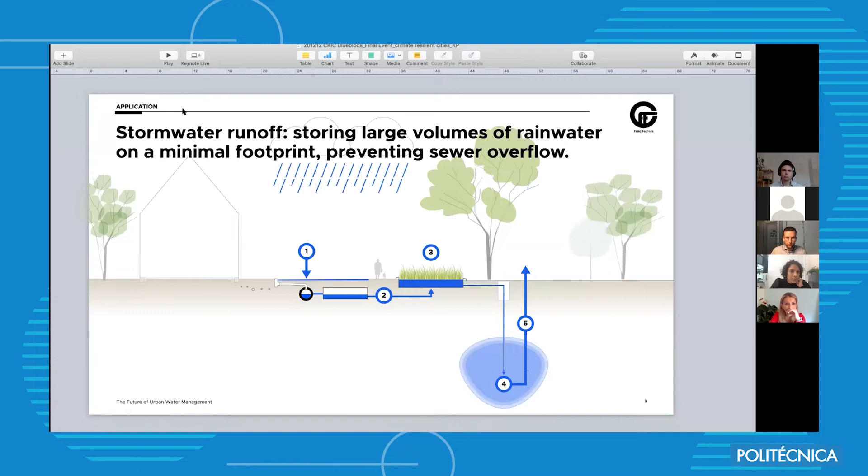Yes, let me see how I share my screen. Well, first of all, thanks everyone for joining us today. Thank you, Francesca, for the introduction. I will see how I am able to present my screen. Sorry. Yes. I guess you're... Oh, why? Are you able to see my screen now? Yes, yes. Wait, I lost my navigator. I started somewhere in there. I guess you have it now. Yes. Is that right? Yes, okay.

Well, first of all, thanks for the introduction again, Francesca, and thanks to you all for joining us today. I will explain what the Bluebloqs circular water systems are about. And first of all, let me introduce myself, maybe for those who don't know me yet. I'm Karina Peña, co-founder of Field Factors. I'm a landscape architect by training, and passionate about water.

I'd like to first start by inviting you to take a look at our cities, at the way we build cities, or let's say our current urban water model. So when we think about cities, and the way we have been building cities since the 19th century, it has of course been accompanied with kilometers of piping work to collect, distribute, and discharge water, first from the source to the users, and then most commonly to the final destination, normally the treatment plant or the sea.

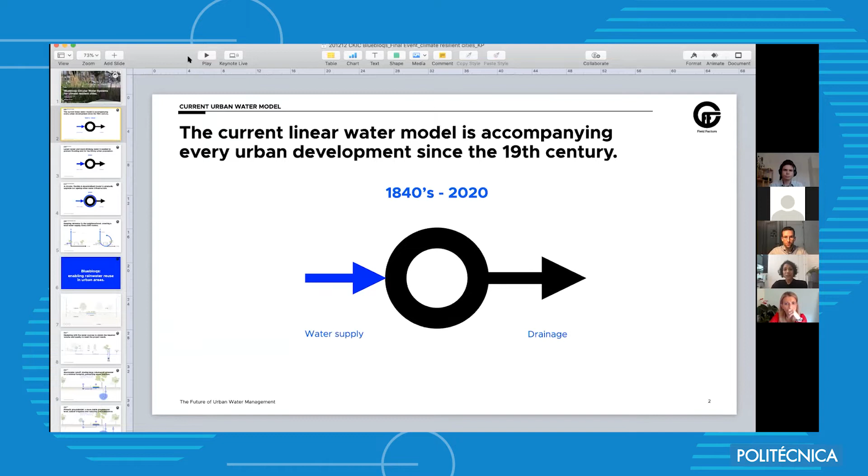But with the current challenges our cities are facing, with more people living in cities, this paved surface is increasing, and more people are demanding larger volumes of water. So it means we will require larger sewers and more drinking water to meet or supply the needs of our thirsty urban population. It also makes obvious that this current model has reached its limits, right, if we continue this way.

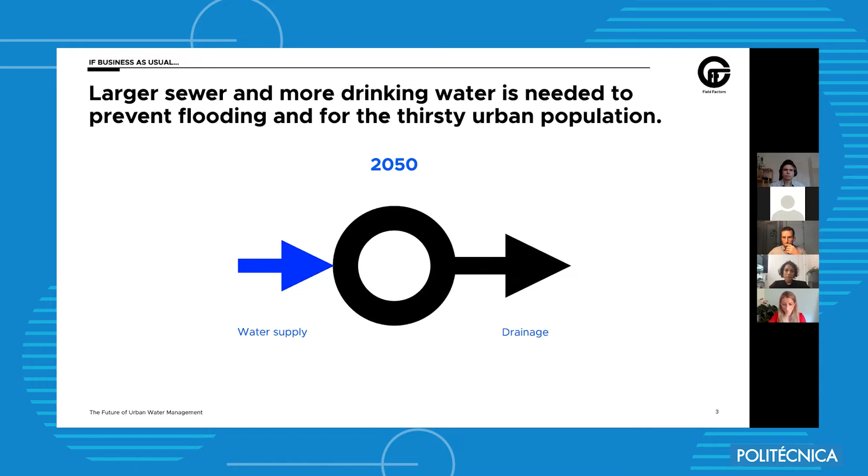So probably the solution could be a more circular, flexible, and decentralized model that helps us gradually upgrade our aging urban infrastructure, to cope not only with larger and more intense rain events, but also to guarantee the availability of fresh water for the urban population and for future generations.

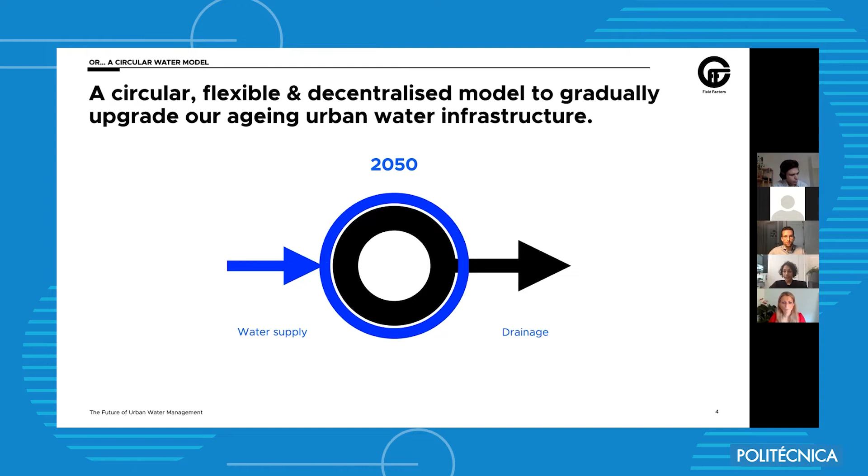How can it be implemented? We see it as feasible through small scale solutions or small scale infrastructure. Our cities are compact and busy enough, so upgrading or changing the whole system at once is not feasible, right? But through small interventions, one project at a time, every time we change or renovate a new neighborhood or street, or face a new urban development, it's a new opportunity to change the system, or to do it differently, right?

So what we propose, what we envision, are nature-based solutions as an opportunity to keep rainwater in the neighborhood, and in that way create a local water source for the local water demand, which can be implemented every 500 meters. In this way, really driving the transition towards climate resilient cities.

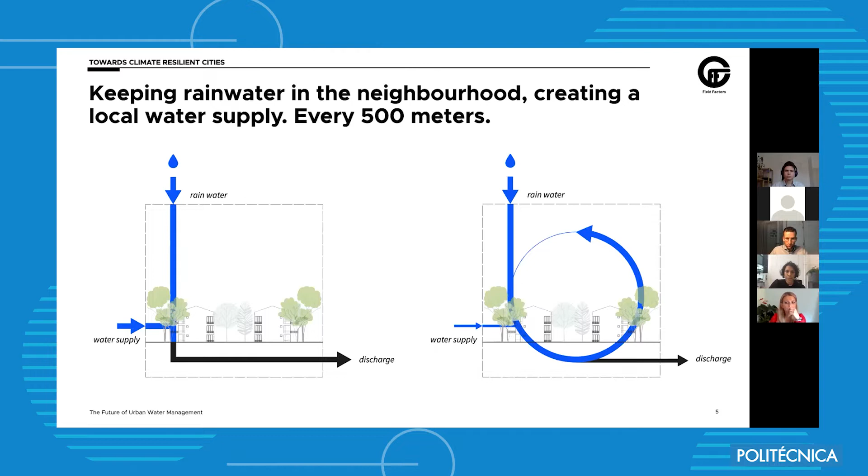And that's what we do at Field Factors. Since 2016, we have been developing the Bluebloqs technology to enable rainwater storage and reuse in urban areas.

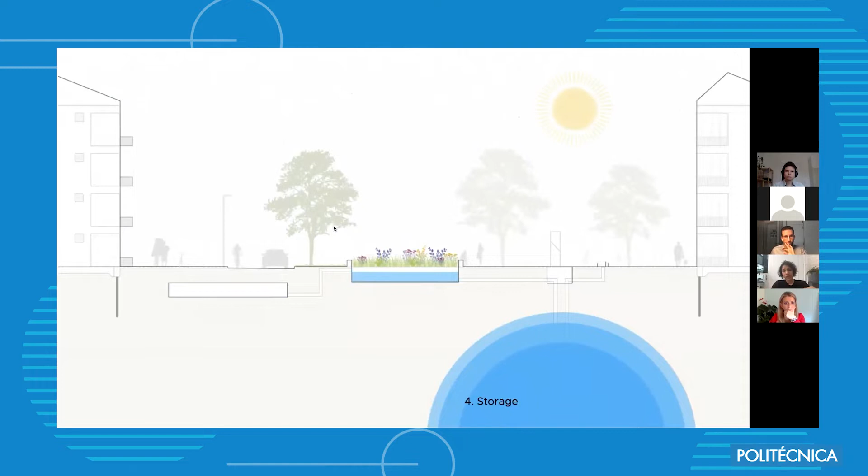And what is that? So what we see in this video is the 5 steps or the 5 functions we integrate through our technology to enable this rainwater storage and reuse. What we see is that we collect rainwater runoff from paved surfaces, which could be roofs or just pavement streets. We retain. Normally, if you collect stormwater, you need a retention solution to temporarily store that water, which can be done in different ways. Could be an underground retention system, but could also be a pond.

Of course, this rainwater runoff is not as clean as we sometimes think. It is, of course, polluted once it gets in contact with the urban activities and the urban context. We treat that water with a biofilter, which is a natural treatment system which can be integrated in the urban scene or urban landscape as a green feature.

And where we find a space to store these large volumes of water is in the underground, using the subsoil to store the water, where it can be stored for a large period of time, or let's say for the longer term, to be then recovered for different uses. So in this way, really having water available when we need it in the dry periods.

So you might be thinking, how can this be applied? So first, the first thing we need to think of is when designing with water, we really need to think in other ways, or change the approach, how we build cities and how we design cities. So instead of already thinking, I need to discharge my water, or consider a local retention solution, we encourage you just to take a look at

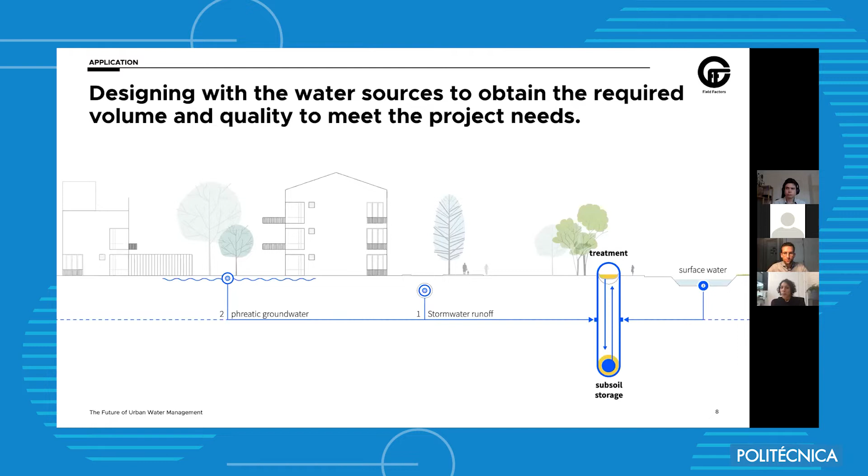your water sources, or rainwater sources we find in the urban landscape that you normally need to manage. It's rainwater runoff or phreatic groundwater, as normally happens in the Netherlands, or surface water. So how can you use or manage the surpluses of these sources and store it for when you need it in the dry periods?

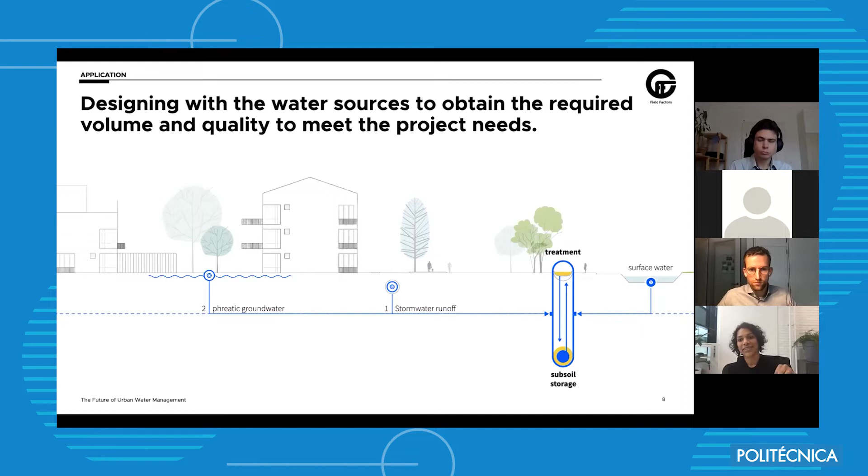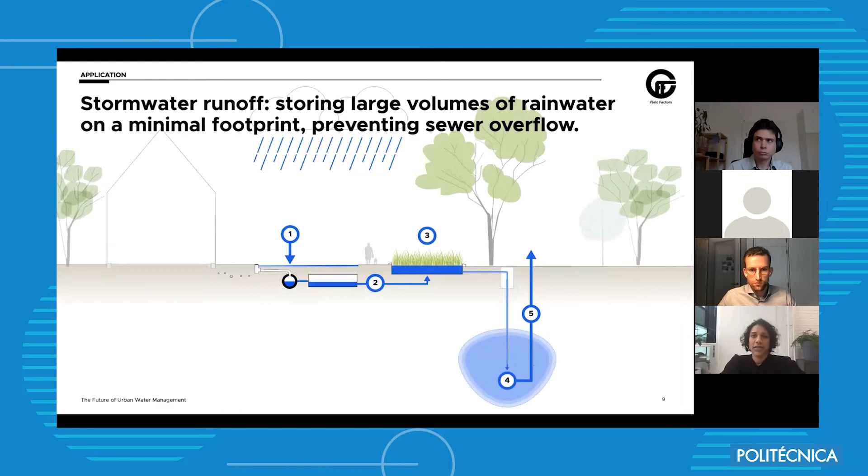So let's take a look at designing with these different water sources, or managing these different sources to apply our solution, the Bluebloqs circular water system. As it is flexible and modular, it can be implemented or designed in different ways. The technical solution will be different for the specific project. Storing rainwater runoff, of course, normally you need to store large volumes of water. That's the problem we are facing nowadays in cities. And we do that with a minimal footprint to prevent, of course, sewer overflow.

That's what's most needed. So if you have a separated sewer, you can do it in a separated sewer, and from there retain temporarily your water, then treat it, and then bring it through infiltration wells to the underground for later recovery. But you could also think of just using the streets as a way to distribute your water to the temporary retention.

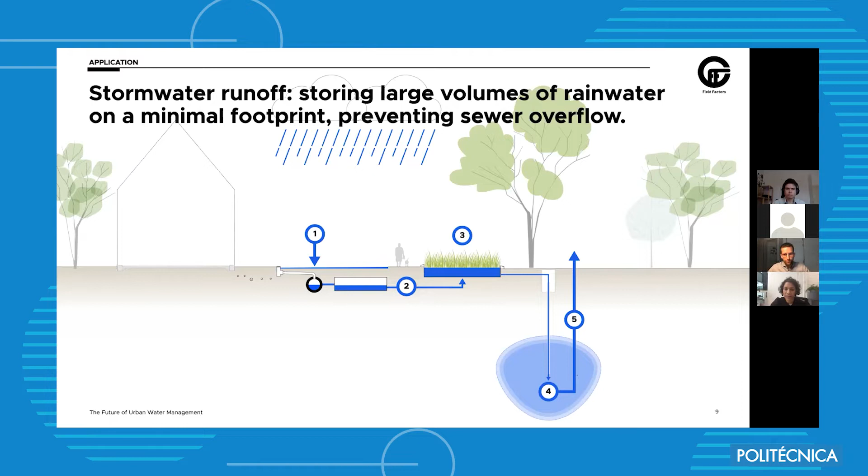In the same way, it can also be applied to create a more stable groundwater level, and in that way also reduce land subsidence. In the Netherlands and other cities in the world, especially coastal cities, this is a common problem. So you can also use the technology to drain when the groundwater level is high, bring that water to the underground and put it back when you need it, because we need to stabilize the level of water in this type of applications.

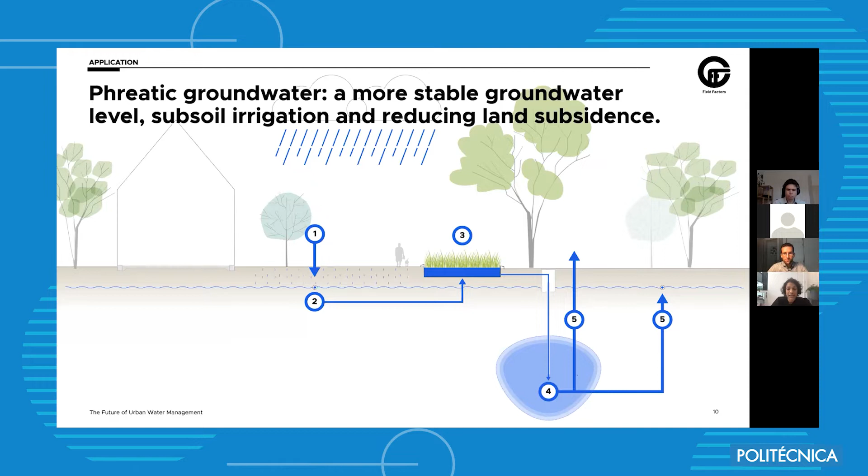Or for instance, using the system to increase the capacity of your current surface water system. For instance, if you have ponds, you could use the technology to bring that water into the underground and regulate the water levels so that the current surface elements can provide more retention capacity for next events. But also you could preserve the water quality by recirculating the water of urban surface water elements in the public space.

And in terms of use, you might think, but is it drinking water? It's not drinking water, but have you ever thought of the multiple applications of water we have for all urban functions, which don't actually require drinking water quality? For instance, what I just mentioned, stabilizing the groundwater level, but also process water for manufacturing or industrial processes, irrigation of urban green, sport fields, flushing your toilets, but also recreation and providing cooling in the hot days.

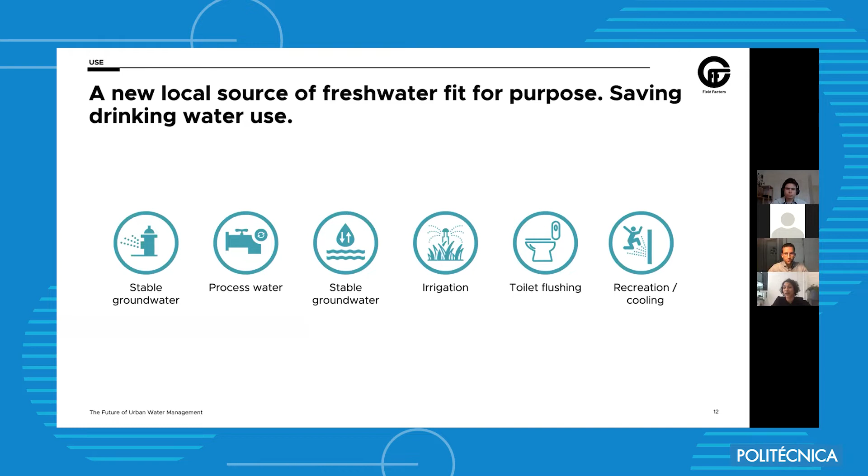So, let's take a look. Where can it be implemented? Actually, the Bluebloqs system is thought to be implemented in every urban development and retrofitting project. And we envision it as an enabler of decentralized urban water systems on a small scale, which can be implemented one project at a time. So think of the renovation of a new stadium, or a new real estate development project, or the renovation of the public space.

Of course, it has limitations, or let's say it's more convenient for projects with specific characteristics. For example, the scale is not for something as small as one house; we think more of projects from 10,000 square meters onwards. That is where you have enough catchment area to be able to store large volumes of water, but where you also have a local demand of more or less 15,000 cubic meters per year. So again, think of a stadium, or toilet flushing, or extinguishing water, and so on.

And the system footprint: as I mentioned earlier, the main barrier to implementing nature-based solutions in cities is that we normally hear we don't have the space. The city is busy. So that's why it is designed especially for highly dense areas where we don't really find the space, to have a small, still green system which is very compact and effective. So the footprint is from 30 square meters to 100, depending on the project scale, of course.

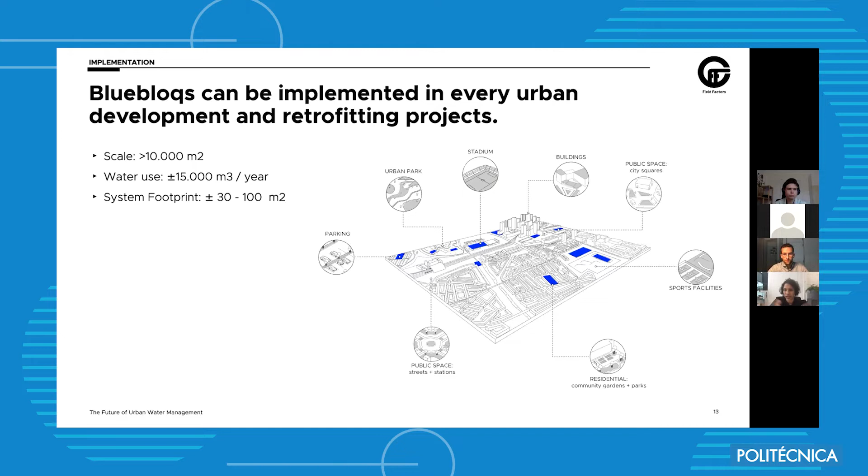And why do we do this? In the end, we are all facing the need and the challenge to make our cities greener, but also cool and climate resilient. The great benefit of changing towards more circular local water management is that we, of course, lower our drinking water use. So we use drinking water for potable human consumption, or when we need drinking water quality. In that way, we also reduce the pressure on natural water resources. We prevent sewer overflow, which is a common problem in all our existing built cities.

We lower the cost of sewer replacement as well, because instead of enlarging the piping network to create kilometers of extra discharge capacity, we can do it locally by just going vertical and using the underground or the subsoil. We also improve the spatial quality by adding green and enhancing biodiversity. And after all, it's a way to restore the natural water cycle in cities, where water cannot infiltrate anymore. So we contribute to adding water to our depleted groundwater resources.

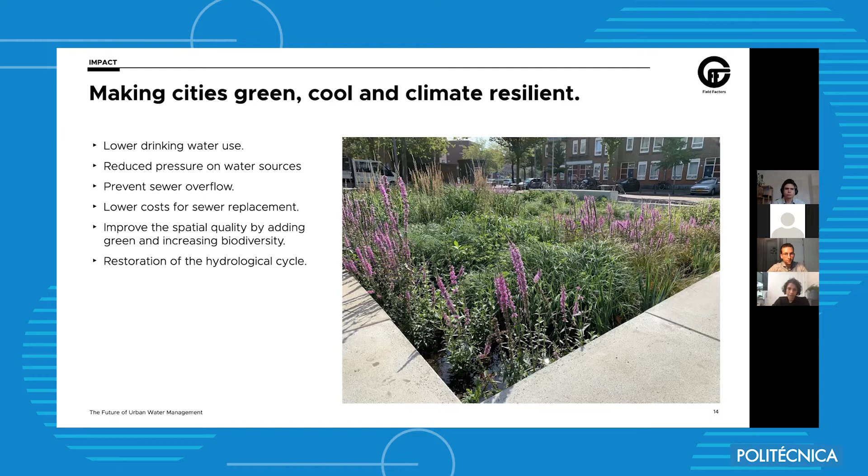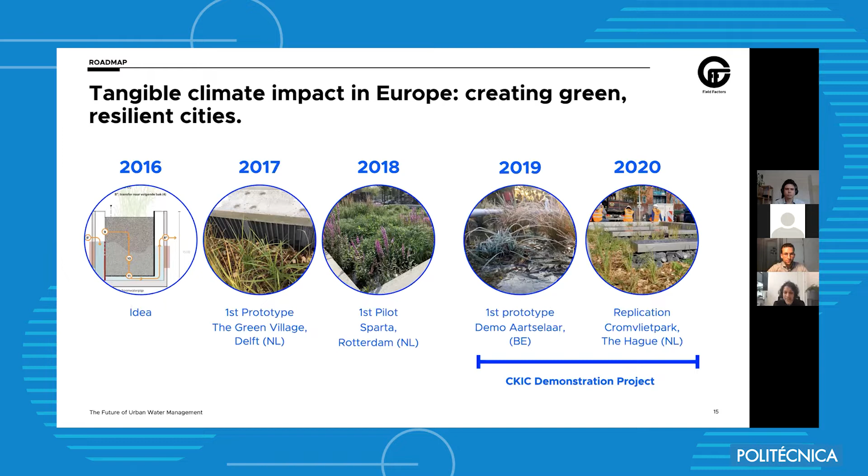Where all this started was in 2016, with just a bold and ambitious idea of a young group of people thinking that we could change the world. We came to Delft in 2016, founded our company, and we had the opportunity in 2017 to implement and test our ideas to prove feasibility. We did that at a test site here in Delft called the Green Village. That was our playground to test solutions, to fail as well, and improve.

Once we could prove that the solution works, we were able to implement a first pilot at Sparta in 2018. We were lucky enough to find a pioneer city or municipality willing to manage water in a different way. So we implemented our system in the first full-scale pilot in Rotterdam in 2018, next to the Sparta Stadium, where the water is used for irrigation of the football pitches.

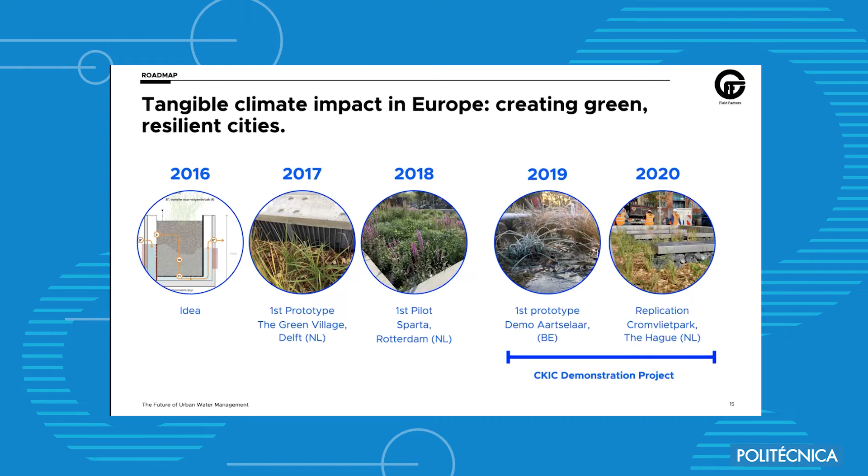And from there, two years ago, having a technology that we had proved works, what's next? We had ambitions of increasing our impact, creating tangible impact throughout Europe. The main goal of this Climate-KIC project was to demonstrate the feasibility of Bluebloqs technology not only in the Netherlands, but also to prove scalability across Europe. So to test it in other climate conditions, but also in other institutional settings with other water needs. We believe this is how we can create tangible impact for green and resilient cities. We will see the results of what we have achieved these two years in the next presentations.

Adam, who is managing next? Adam, are you there? Okay, maybe I can also answer some questions in the meantime. Boris says he has a question. Yeah. Okay. Yeah, I cannot unmute myself. So thanks for doing that.

Thanks, Carina. I have one question that has puzzled me a bit for a time. So there are various types of water that you can store in the underground. But what's the advantage of storing surface water particularly? Because I can understand the logic of rainwater and phreatic groundwater, but surface water seems a quite controlled water body. So what's the concept there? I missed that a bit.

Actually, two things, I would say. In the Netherlands, what we used to do is just pump the water away from the surface water in our whole controlled water system. So in that way, we reduce pumping water away, for when we actually also need it in the dry periods. In that way, you keep it there. But also, think of other countries where the whole water system is not controlled, as in the Netherlands.

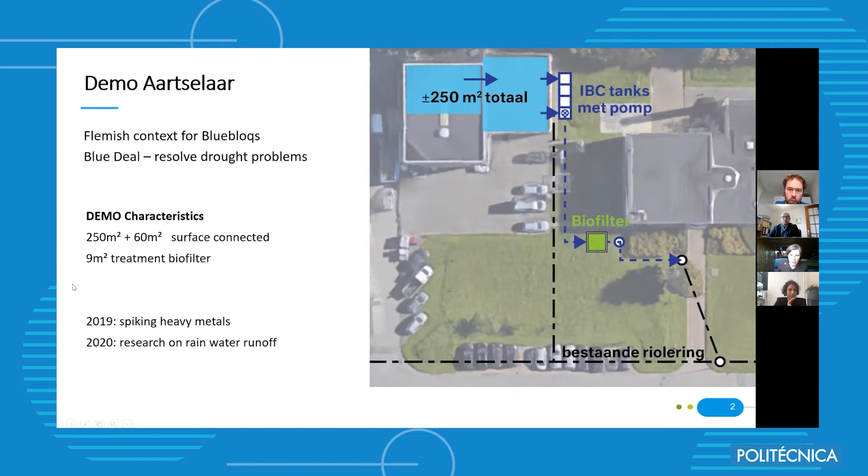As I said, we started the project together with Field Factors in 2019, and then we built the Bluebloqs demo in July. From August to December, we had a thesis student from TU Delft, Pim Versteeg, who is now working for Field Factors, doing some experiments on the Bluebloqs. Then in December, we had a stakeholder workshop as well to show different stakeholders from Flanders how it works, what the first results were, and to ask them what they expect from solutions like this.

This year we focused on more organic compounds such as BOD, COD, pH, with weekly sampling, and then monthly sampling of metals and bacteria. But I will get into more detail about that in the next slides.

So the sampling in 2019 was done by Pim Versteeg, and he spiked the influent of the Bluebloqs with heavy metals every 3 weeks from August to December. He sampled the influent and effluent, but also inside the biofilter to see the effect inside the biofilter on the retention of the metals.

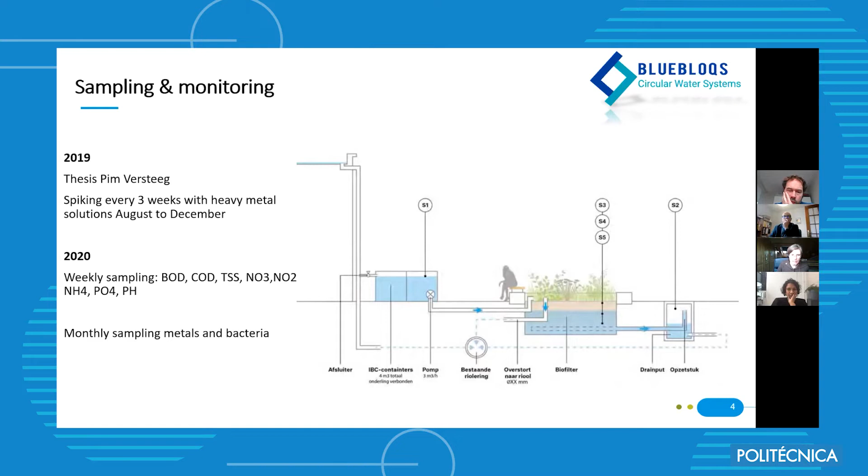This year we focused especially on the influent and effluent for different compounds such as BOD, COD, suspended solids, NO3, NO2, ammonia, and things like that. The metals and bacteria were sampled only once a month.

As you can see, the removal efficiency of the heavy metals that were spiked was really high. The first blocks you can see here - this is clearly the startup period where we even saw the running out of metals. But after a startup period, we saw really nice removal rates of copper, lead, cadmium. Only zinc and molybdenum we saw less good results, but we think this was especially because of bad mixing of the spiked solutions. So because there were very low concentrations going in, we couldn't really see a big removal efficiency.

The same goes for arsenic - the concentrations were so low that we also couldn't see a lot of removal. It's obvious if you're not putting a lot of concentration in, then you will not get a lot out of it.

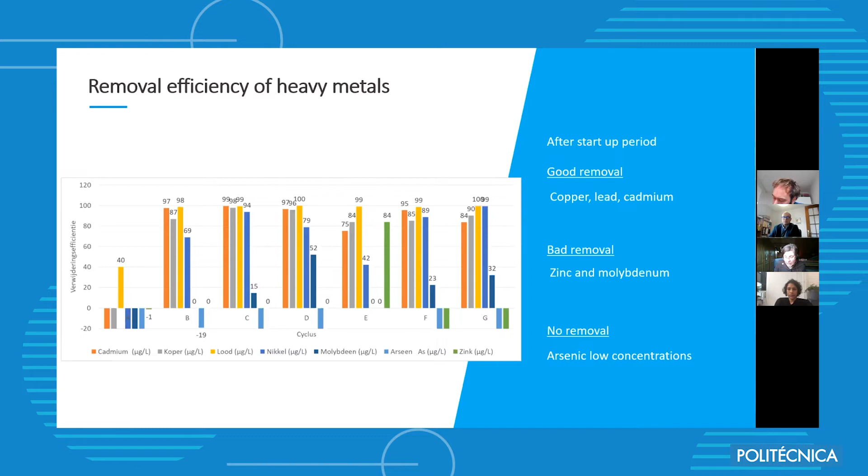For the pathogen removal, maybe it's interesting to tell you that pathogen removal is quite important for us in Flanders, because if you want to do aquifer storage recovery, so deep infiltration of water, then our legislation is really strict on pathogens. So we're not able to infiltrate the water if there are still pathogens in it.

In the first few months, we saw that there was actually no pathogen removal at all - E. coli was just all over the place. But then when the biofilm starts to form and the biofilter matures a little, we could see that E. coli was removed better. The same goes for coliforms, but other contaminations such as Clostridia and Enterococcus were not really removed - there's not a clear trend in the data. So we still have to look a little further into pathogen removal, or maybe even consider adding an extra step, like UV, to remove pathogens.

For the heavy metals, we saw that very low concentrations were going in, so the influent almost didn't have any metals except for lead. Since the concentrations were almost always below the groundwater restriction levels, it's not that interesting to look at these metal removals since they were so low.

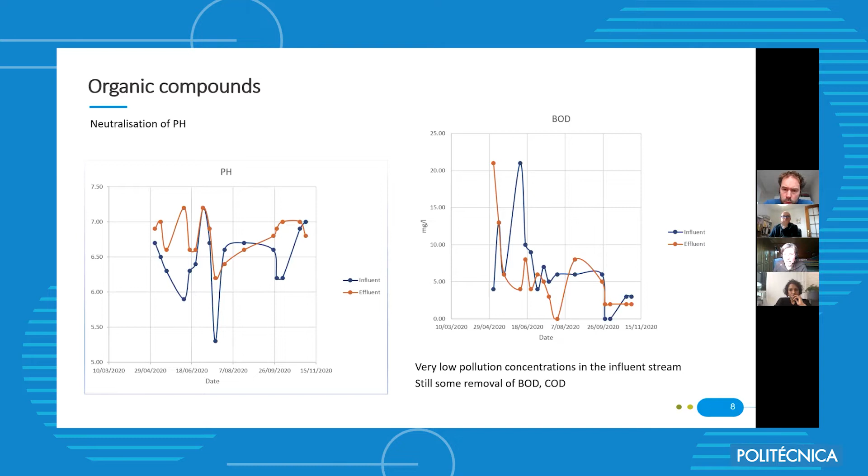For the organic compounds, we could see a clear neutralization of pH, which is very interesting since it's also important for metal retention - the pH of rainwater is quite acidic. And BOD, the organic compounds, were clearly removed by the biofilter. Again, we have quite low concentrations. So one of the big conclusions is that the rainwater runoff of the roof in Aartselaar is just actually too clean - in normal conditions, you wouldn't even have to purify this water since it's so clean.

We do see a little bit of nitrite. The effluent is definitely lower in nitrite as well as nitrates. In the beginning, during the startup period of the filter, these concentrations were not that good, so the removal rates were not that good. But as it matures, we can see that the removal of nitrate is definitely picking up.

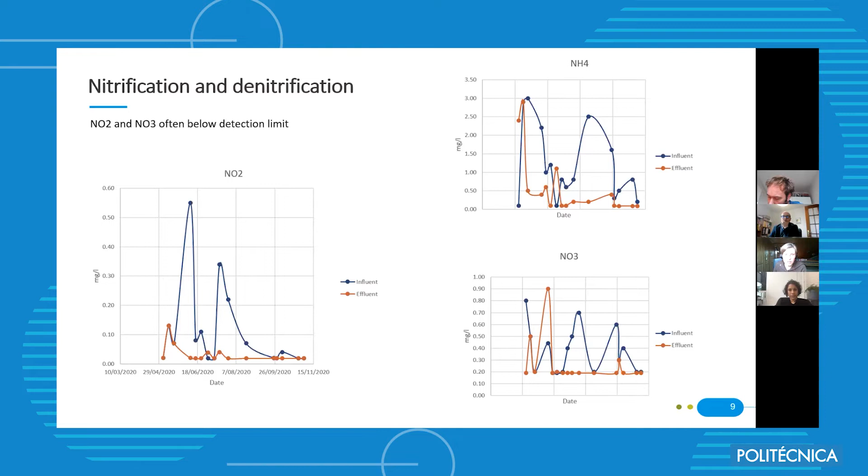Now, what are the remaining challenges for us in Belgium and Flanders? Definitely the pathogen removal is something that we have to have a better look at, since ASR is not possible regarding this water quality. We have very strict legislation regarding the pathogens.

We also lack values regarding recycled water use. For example, for rainwater, we don't have very clear legislation. So mostly now people use drinking water quality normation, and obviously that's very strict. So that's something we should look at with the governments.

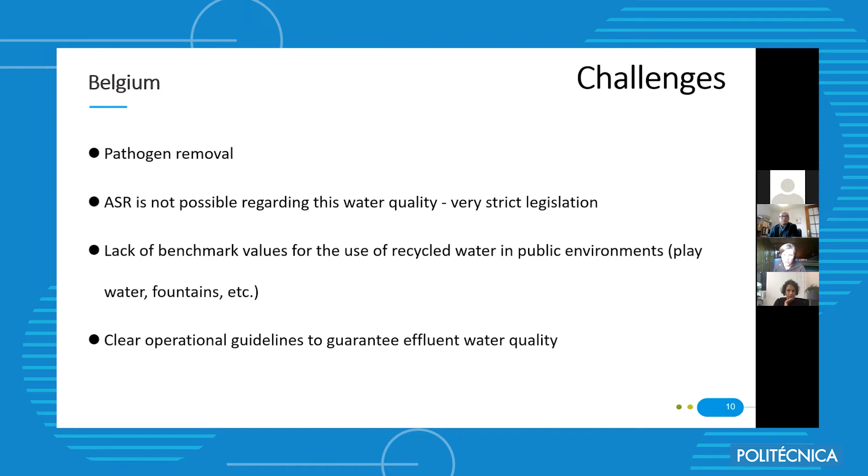Also, very clear operational guidelines are very important for us. If you want to stimulate municipalities to install Bluebloqs, then it has to be really clear how they have to operate them, how it will work, to have a guaranteed water quality.

What's next for us? Since the runoff water of the roof is so unpolluted, we will look for a new location to install the Bluebloqs, so we can keep on measuring.

Polyaromatic hydrocarbons is something that we want to have a look at, also mineral oils, because we can see that runoff water of streets contains these components sometimes. We will follow up on the studies being done by TU Delft and Field Factors, of course.

And we will keep on looking at legislation about ASR, because we think that's a very important aspect of Bluebloqs, or a very important plus point. If you can store it deep underground, you do not need that much space, and that's something that in Flanders is quite critical.

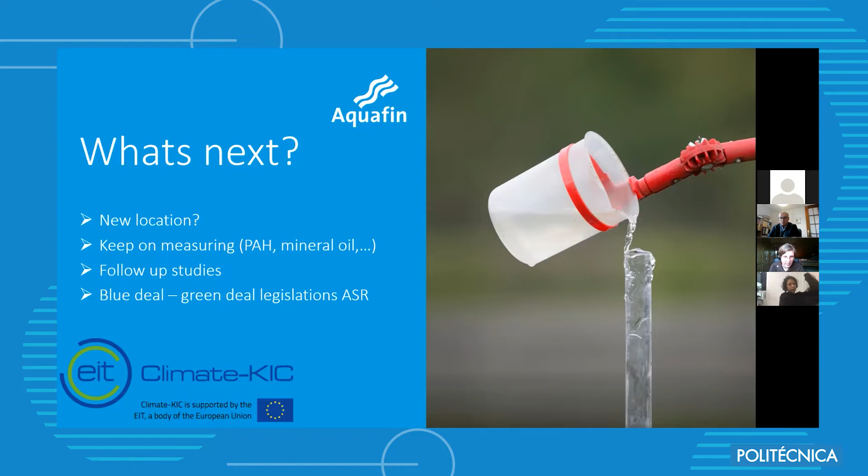Whoops. Then I can see the questions, if there are any. Thank you, Birgit. Yes, there are two questions. The first one is from Alexander. Alexander, do you want to ask your question to Birgit? I think we have to unmute him then.

Good afternoon. Hello. Thanks for your presentation, but my question was actually for Katrina, from the former presentation, but maybe you can answer it too. My question is about the time the water stays in the biofilter, to let the cleaning do its work, before infiltrating to the lower buffer. Can you tell me something about that, please?

Yeah, I think I can answer, although my colleagues will... I am listening to myself. Thank you for your question, Alexander. I will try to answer a little bit. I'm listening to myself, though. Although my colleagues will touch on this in the next presentations.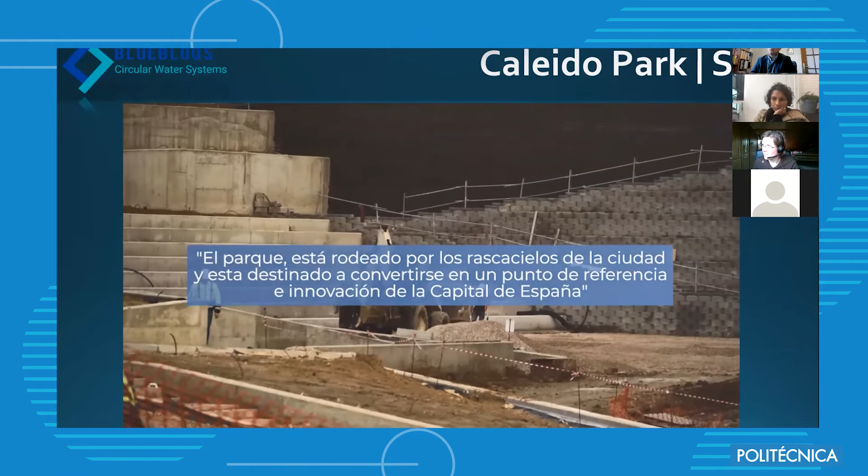Well, sorry for the subtitles, we have problems with this.

But as you see on the video, the Caleido Park urbanization is an iconic place of the city in Madrid. This green area is surrounded by the five skyscrapers of the city, and the Bluebloqs system will be located on the confines of the architectural pond at the center of the park.

The stormwater runoff will be collected through the park's rainwater collection systems and treated using the Bluebloqs biofilter, to later be used to maintain the water level of the architectural pond.

The complexity of the project is the weather conditions in Madrid, because they are different than the other two demos in the Netherlands and in Belgium, as it's a semi-arid climate with an average annual temperature of 13.7 degrees Celsius and an annual precipitation of around 450 millimeters.

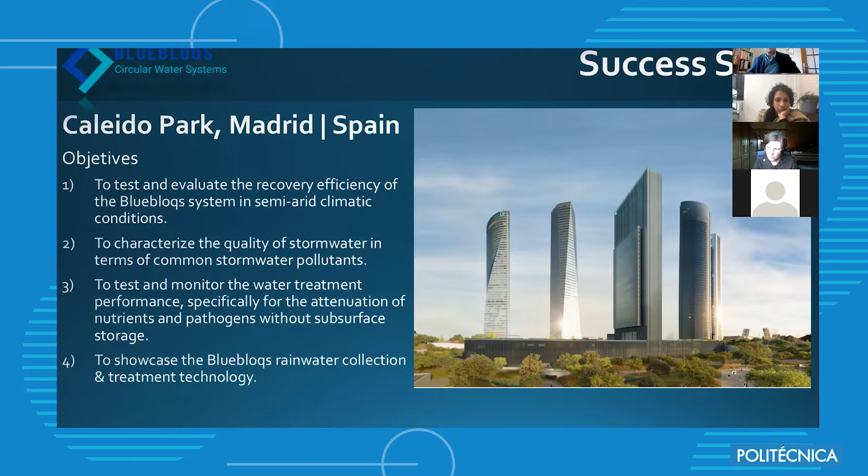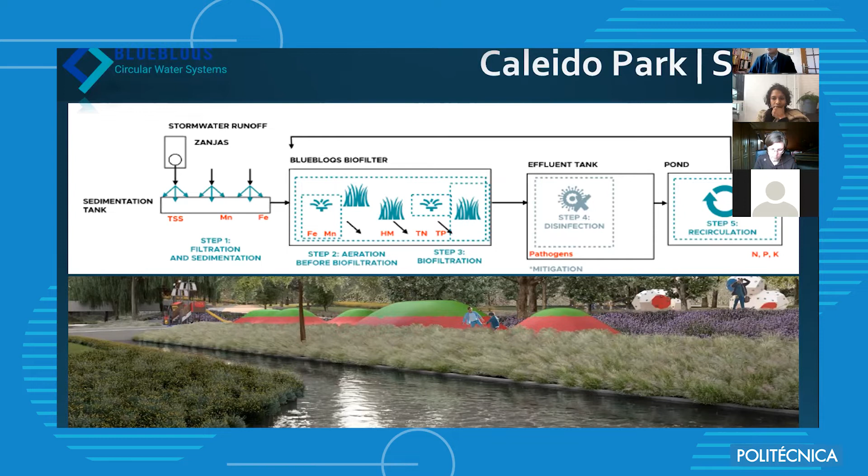This is the aspect of the biofilter, or all the steps that the Bluebloqs system will have. The first step is the infiltration, filtration and sedimentation part. Then we have an aeration and biofiltration part, followed by, if necessary, a disinfection part that takes off all the pathogens. And then we have the recirculation of the pond. These are the several parts of the demo that are going to be installed.

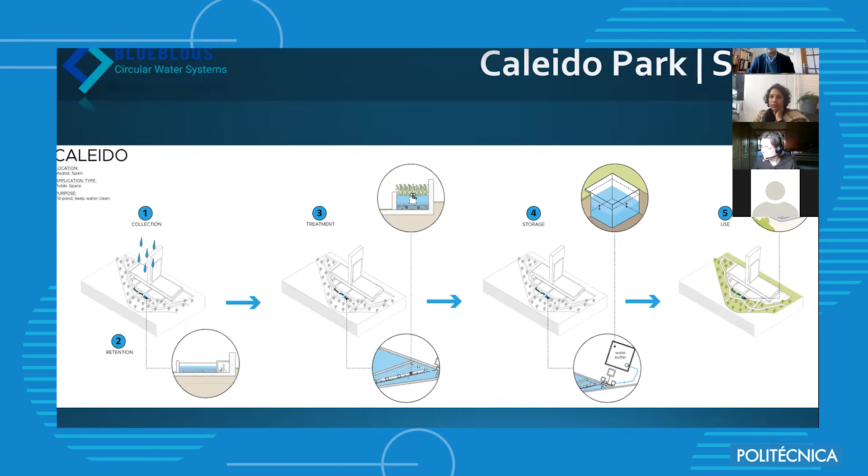The construction of the biofilter is underway, because we have had long delays due to the COVID-19 problem during this year. All the achievements of this project in Spain are principally the engagement that we have reached with the City Hall of Madrid, and also the agreement with the owners of this iconic place to implement the system inside the park.

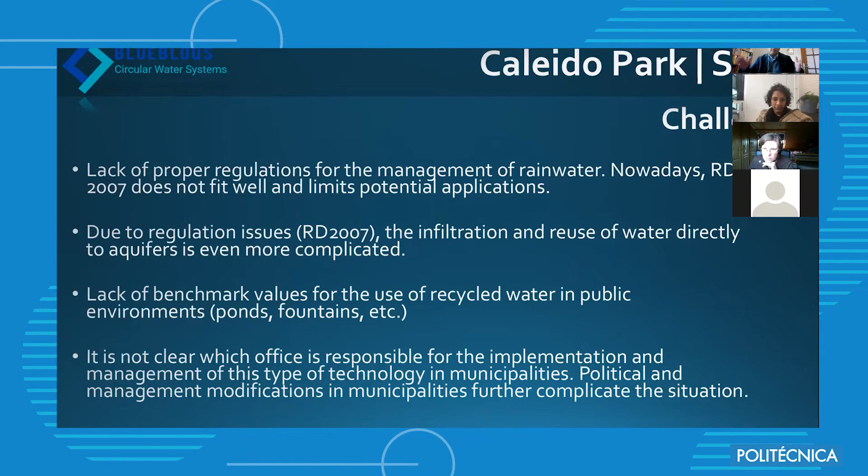What are the challenges that we have identified? There's a lack of proper regulation for the management of rainwater, and also due to regulation, the infiltration and reuse of water directly is complicated and is not allowed right now. We also identified the lack of benchmark values for use of recycled water in public environments. And after the implementation of the biofilter, it's not clear which office is responsible for the management of this kind of technology, and there needs to be clarification during the monitoring period of the system.

Now, do you have any questions about this demo?

Well, I let the turn to Joshua Gallegos, who is going to tell us about the demos in the Netherlands. Before that, sorry, may I just make one short comment related to Boris' question before, the project in Caleido is...

A very nice example of how the system can be used to manage surface water. In terms, we will be recirculating there an architectural pond in the park to keep it at good quality. Yes, that's something to emphasize.

Thank you, Karina. Well, this is the video of the Hitteplein in the Netherlands.

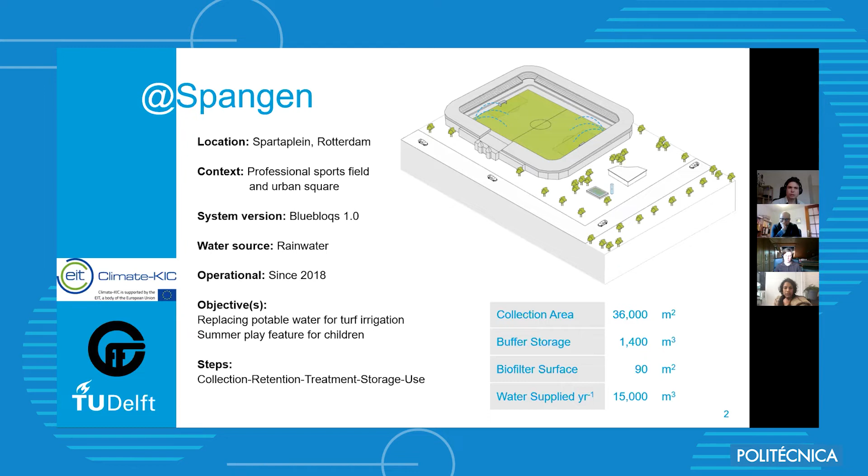With the Spangen site, under the Climate-KIC project this year, TU Delft conducted research specifically on water quality at this location, on the fate of metals, and also fecal indicator bacteria and pathogens within the system. These are two parameter groups really relevant to reuse applications, and stormwater contaminants that come up a lot because they frequently occur in elevated levels in stormwater.

We had two master's theses, one on each of these topics, and we learned a lot about how the operation of the system affects performance when it comes to removal of a wide variety of metals, and also about four different microbes we were looking at specifically, going into the system, coming out of the system, and after the subsurface storage step.

This is quite relevant to legislative oversight and the permitting process. The metals are on a permit granted by the local water board, Delfland, and required to be monitored regularly. The microbes in the Netherlands are actually not a parameter looked at on this permit, mostly because aquifer storage is known as a treatment barrier for pathogens and is generally considered quite effective for that.

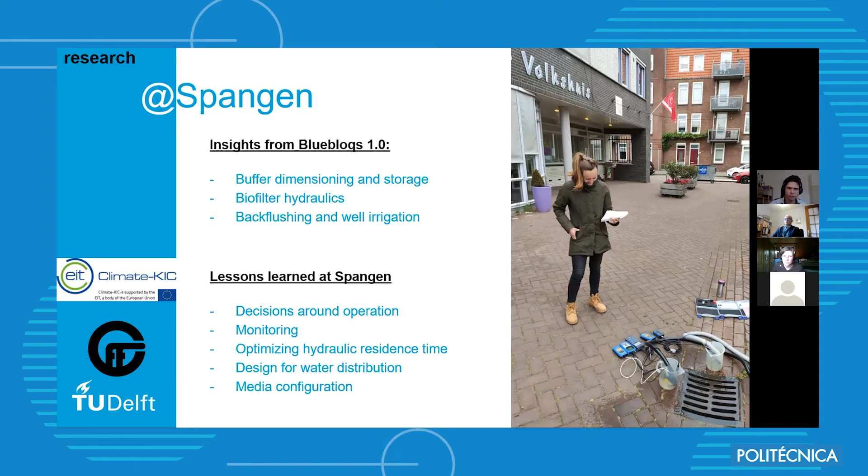The second installation that I'm going to talk about is the Hitteplein here. So this is the video that you just saw, and I'm sure I'm not the only one who didn't completely understand the narrative there, but the short of it is that the Hitteplein is a technology demonstration space. This is the second system that's been installed there. So municipalities and various other visitors will come to look at the Hitteplein to take a look at upcoming technologies or technologies in development, specifically for climate resilience.

The system that we have installed there is a test pilot, and it will be used to test biofilter improvements in support of the full-scale system in Spangen. Some of these improvements will be mentioned on my next slide, but just briefly, the scale is much smaller, of course, here. So we're collecting from about 1,600 meters of paved surface of the Green Village. We have 4 test plots that are all outfitted a little bit differently for testing reasons.

And I think in addition to the test function and demonstration function, the water here will also be used to supply a bathroom for toilet flushing at the Green Village as well. And this Hitteplein means the heat square, and this is really focusing on demonstrating cooling adaptive technologies or technologies that can contribute to urban cooling. Here on the final piece, we do not have an infiltration step. We're really demonstrating how the water can be applied to irrigating green space and the other application in the bathroom.

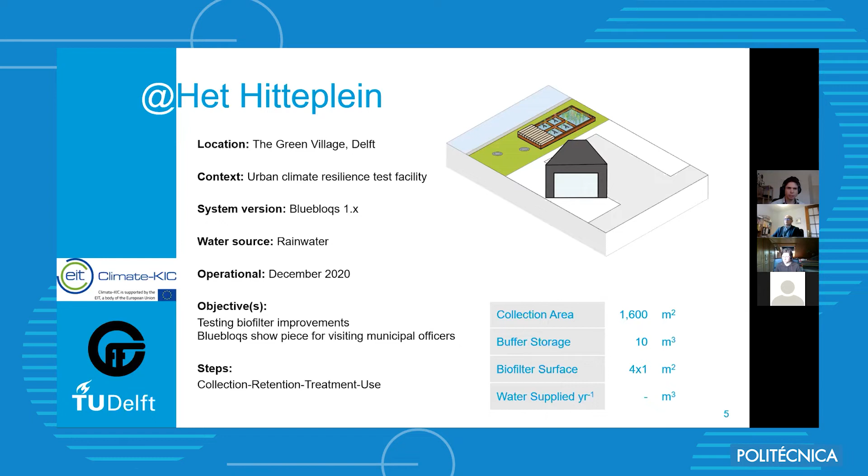So some of the goals of this pilot are to assess the effects of different media configurations, which we are playing with based on our experience at Spangen. We have designed a new water distribution system, which is sort of a prettier version of the one that went in at Aquafin. You can see it on the right here, but that has a number of different justifications in terms of water quality as well, having to do mostly with water distribution and aeration.

We're going to be testing different feed regimes, so how fast you put water into the filters and how long the water moves through the filters there. And we have also made a few additions to the technical components here. Again, this is what we call a living laboratory. It's very near the Field Factors office and on the campus of the Technical University of Delft. So we have ready access to perform research, sampling, very close monitoring and evaluation of what's happening in this system as we make different adjustments that we want to see the results of.

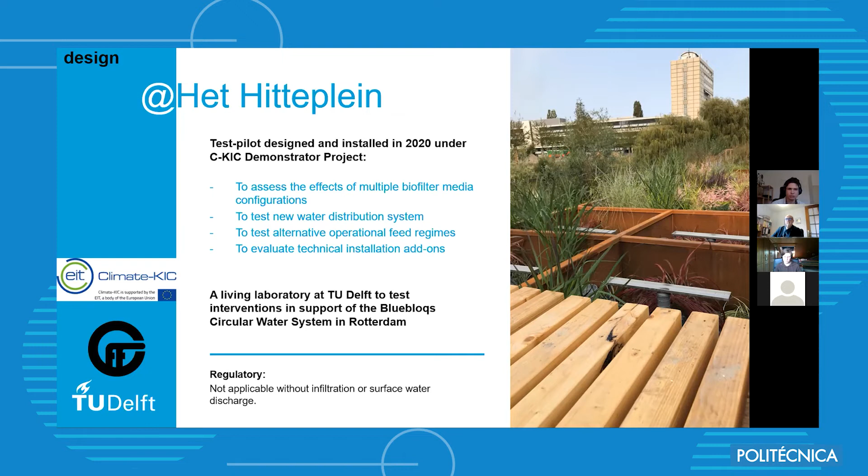The goals of the research here are really focused around manipulating pH and redox conditions, which are highly relevant to treatment of a wide variety of pollutants beyond just metals and pathogens, but looking at dry and wet cycles, soil moisture control, and again, as I mentioned before, balancing feed versus retention, which is sort of a quality versus quantity issue. It's a pretty clear thing if you think about it a little bit. The longer you keep the water in, the less water you are able to store. Design upgrades I've mentioned a little bit before.

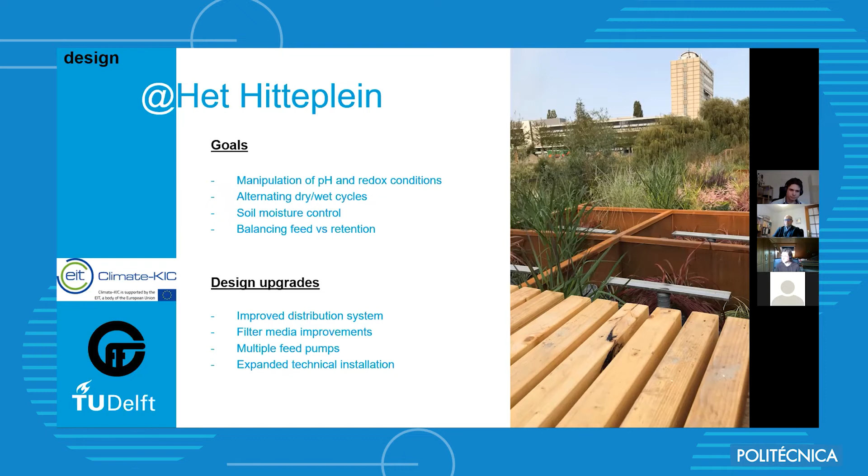So I will move on to the last site here, which is at Cromvliet. I think we have one more video coming up after my presentation here. The Cromvliet site is located in the city of The Hague, and this is also about a block scale where an urban park has a collection surface of about 8,500 meters. The demand is around 2,000, and the water there will be used to supply urban gardens. So there's a community garden there where vegetables are grown, but also quite a large green area of grass, where an urban farm with livestock animals is kept.

So this will be, again, all 5 steps of the Bluebloqs concept applied, including the subsurface storage. And the novel feature here, besides implementing some of the new components and design changes that we have made since Bluebloqs 1.0 in this first full-scale Bluebloqs 2.0 system, is that this is also the first system which will utilize both surface and rainwater to provide long-term storage for the urban green space maintenance.

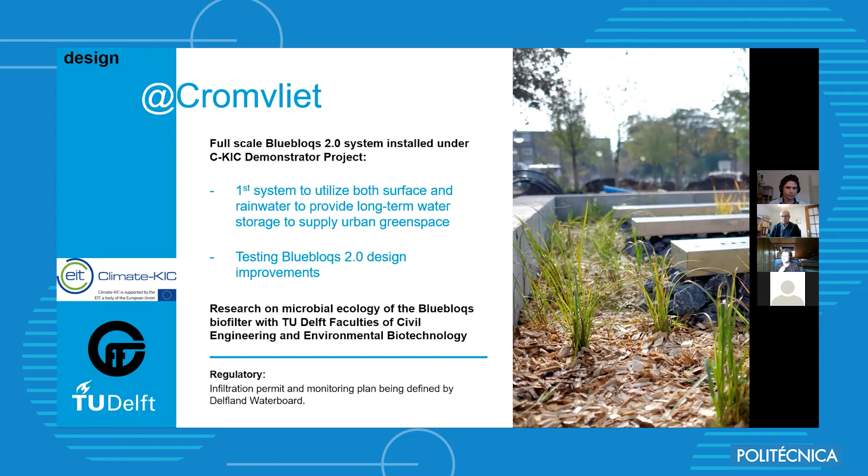Again, the design upgrades I went into a little bit already, but we have a different filter media here. We have a much elaborated water distribution system that's giving us better spreading and aeration of the water passing from the buffer tank into the biofilter itself. There's also a new well configuration for the infiltration, which allows for longer subsurface storage, which in theory would give you better pathogen removal there as well.

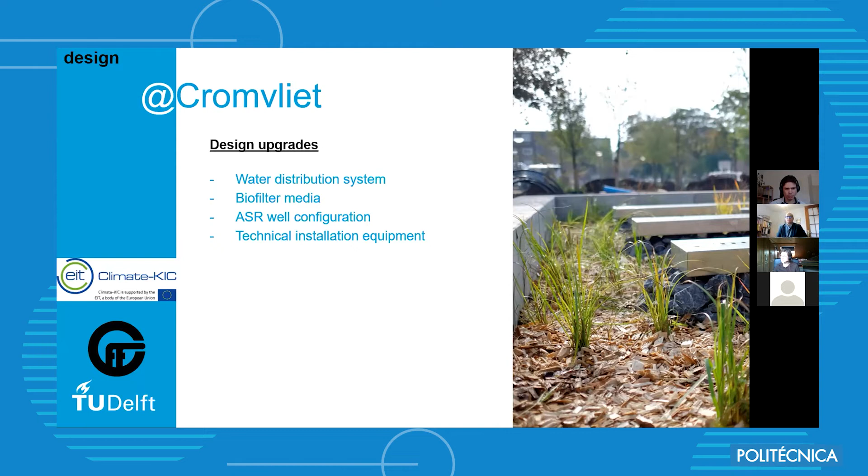And there is a more sophisticated technical installation here with more sensors, because again, this system, along with the other demos, aside from Spangen, was built more with a research purpose in mind, trying to identify when during operation we see the best results in water treatment performance.

So one final piece that's a little bit less technical, but something that's also very interesting to me as a PDEng. This professional doctorate is sort of half academic and very much applied, and the reality is that the function of the systems comes down very much to implementation and operation and human factors. So we have also been developing commissioning protocols to really baseline system performance at the outset, to understand how settings are made in terms of justifications and assumptions that can be compared to how the system performs later over time, and really can provide insight into how we adapt it to improve the performance based on the initial settings. And this is, of course, still a learning process.

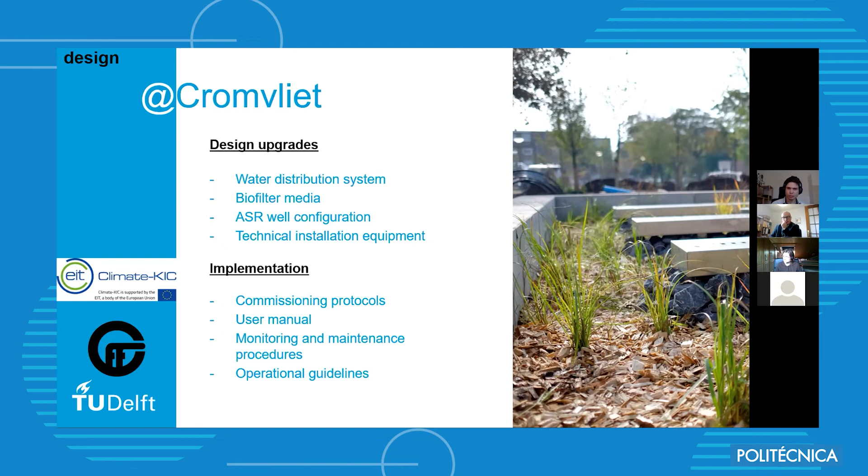We've also been developing a user manual to better communicate these sort of details to stakeholders, municipalities, and other project partners, and monitoring and maintenance procedures, which will elaborate the basic operations that need to be done to maintain the system and what to look at. And finally, the operational guidelines is where this ties back to performance: how do we operate the system and why, and that should all be outlined. And of course, this information is something that we're generating, and we need to communicate eventually in official ways, as was referred to also by Brigitte in the earlier presentation.

So yeah, going into my reflection on the work we've done in the past 2 years of the Climate-KIC Bluebloqs Circular Water System Demonstrator Project. The first thing is pretty obvious to anybody who's worked with public project implementation, but the implementation of our demos was slow. It took a lot of time. It was very ambitious to have 4 running systems within 2 years, novel systems that are not super big, but not tiny in scale. So COVID 2020 aside, even the public tendering process and various construction delays gave us a very slow period till we saw these systems implemented.

However, that also gave us a lot of time to really zoom in and learn lessons from the system that we have had operating in Spangen, to look at the data from there, to generate a lot of new data from there, and to understand how the way that things have been run in Spangen can be improved, and what has worked and what hasn't worked, and really to be able to translate those lessons into the design of the new system.

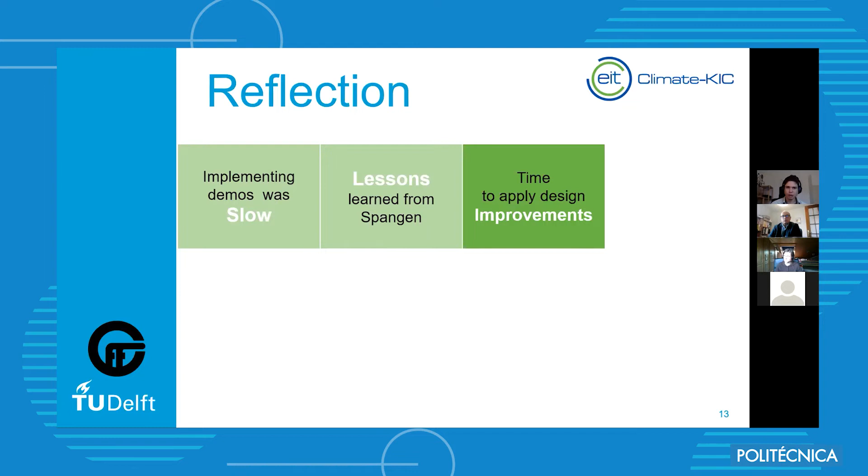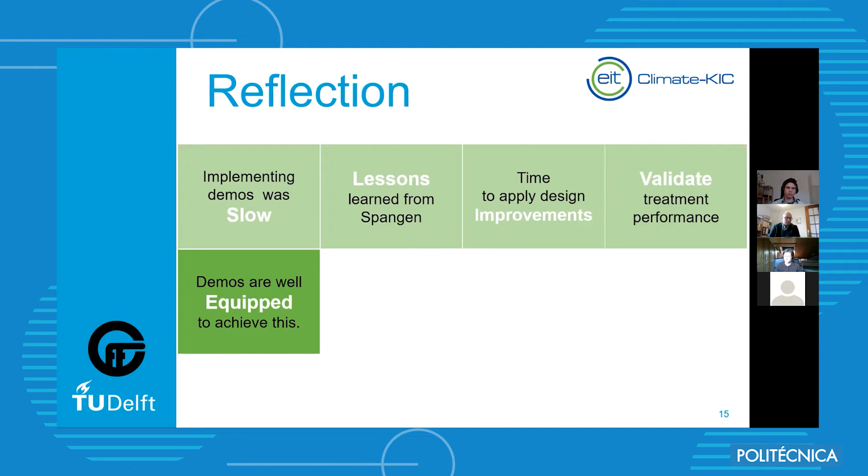It's clear that validating treatment performance is still a priority, and that's something that anybody who is thinking about installing something like this is going to be wanting to see hard numbers, hard data about what they can expect from the system and what they'll need to do with the system. And what we have now are demos that I think are well equipped to achieve this, that are outfitted in such a way that we'll be able to collect more data, more information faster than we have up until this point to really shed light on these treatment issues.

As I said, I think probably a couple of times already, the operation is critical, and I know this may sound a little bit foreign when I say that operation. What does that mean? Operation of a green biofilter. Well, logic-controlled biofiltration is still, in fact, a cutting-edge technology space.

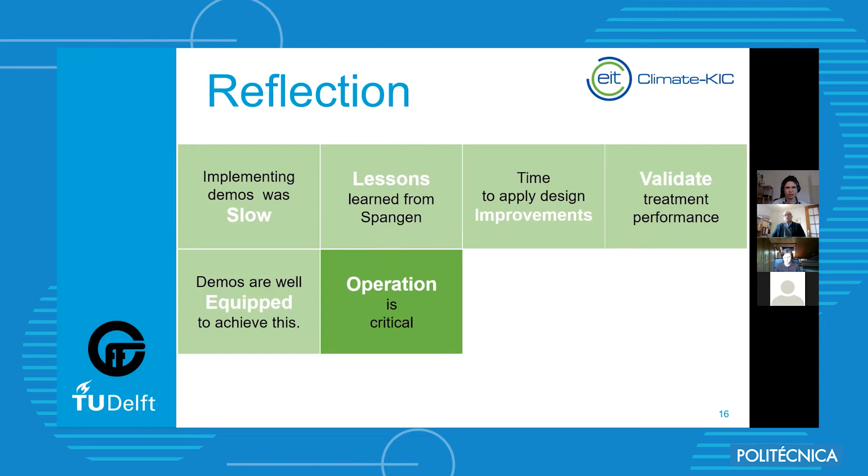So there is still not a lot known about this, and there is research in the academic world ongoing that indicates there are tremendous possibilities for optimizing the performance of these filters to provide reliable or more consistent water treatment results. But this is indeed the area that we're working in, and the reason why these demonstrators were set up. So there's still a lot of work to be done there, but definitely we're seeing some very promising things in terms of securing that performance.

There is a need to understand how to monitor the systems at this level, which is something that probably operators used to managing conventional systems for municipalities are not experienced with, and will not likely have the resources to spend the kind of time that I'm spending to do this. But what that leads us to, I guess, is a final point for me, which is that there's a gap between the potential of the system currently and the institutional capacities to operate them optimally.

And that doesn't necessarily mean that this is an insurmountable hurdle. Of course it's not, but what needs to be done is the work to validate these design configurations and operational settings, and to produce guidance that can make the system eventually more turnkey or simpler to manage for those who will eventually be managing them. So in this way, from the beginning of interest in a project or interest in installing a system, we can communicate a shared understanding about function and requirements all the way through product delivery.

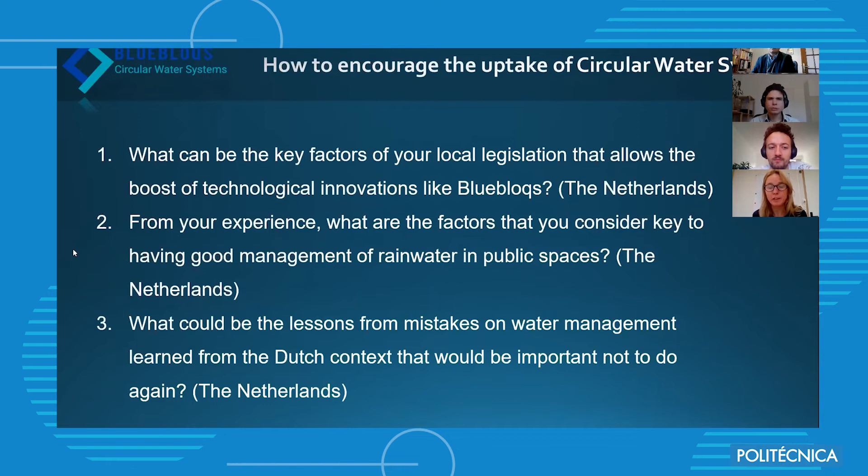Good morning. My name is Marianne Grijns. I'm the director of an innovation program called VP Delta. I'm also the director of the Green Village, the field lab where Field Factors tested their first version of Bluebloqs and is now testing the second version. We strongly believe in this innovation ecosystem of having startups, field labs, and scientists working together with public parties.

Great, then next one is Manuel. Are you with us, Manuel? Sí, bien.

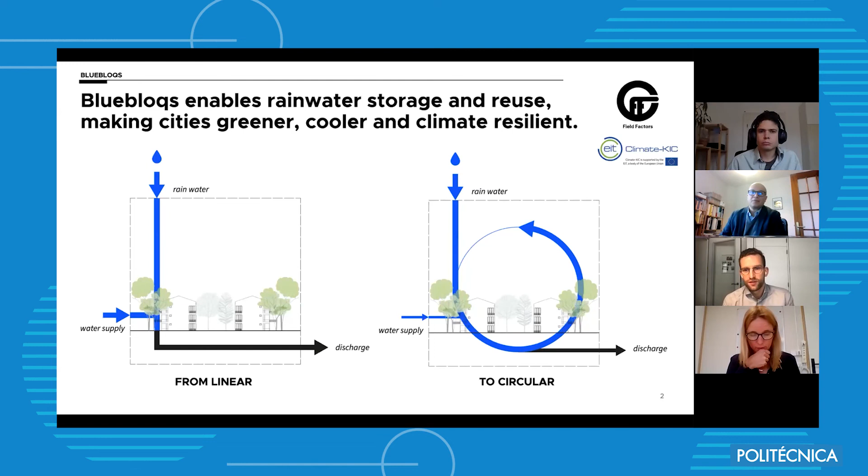I feel sorry that I had to end this good panel discussion. I think there were some very relevant insights from the people working on this in the field, but also from the other end, as technology providers and Field Factors. In my role as project coordinator from the Bluebloqs project, I have the honor of reflecting on the results we achieved. I wanted to start with the original idea we started off with in terms of what we aim to achieve with the Bluebloqs project in the long term.

As Carina already introduced, we believe it's time to make a transition from the centralized linear water system by creating more decentralized circular water systems, in order to support the water managers in the city to not only prevent sewer overflows and reduce sewer replacement costs, but at the same time make that water available for reuse during dry periods. I think we've heard all about that, and the ambition we actually had is a long-term one, by 2030. We set out thinking, wouldn't it be nice if we could actually have this decentralized grid, like the smart grid for energy, but for water, a decentralized grid of circular water systems that can help communicate and provide a real new source of fresh water for urban areas.

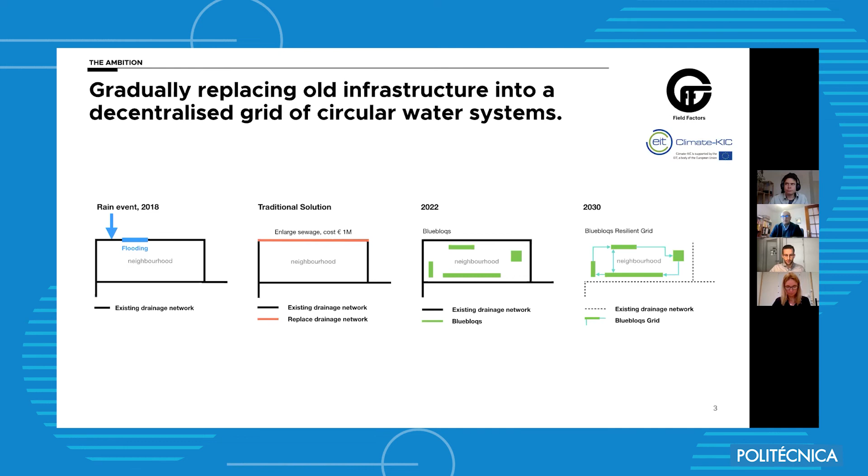Of course, we know that's very ambitious and very much a long-run goal. But it's always good to have in mind what the future could look like, while at the same time we've really been working much more on the practical side of things. Therefore, I want to take time here to say a word of thanks to all the partners who helped make the great progress in the past two years.

Of course, with Aquafin, UPM, and TU Delft, but also with the implementing partners, the municipalities of Madrid and The Hague. It's really great to have Manuel and Wiebke here, but also from the gemeente Leuven, eCatalyst. I think with this team, we managed to achieve some really great results, and it's too short a time to share all of them with you, but I will try to give a brief summary of the work that was done and the impact we have created.

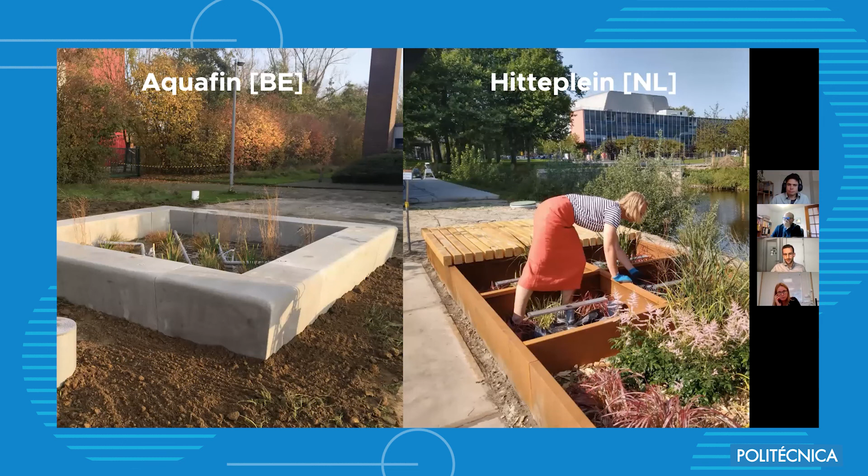In terms of the demos, much has been discussed, but I do want to highlight that within two years' time, we managed to have all these different demos implemented throughout the European Union, in the Netherlands, in Belgium, and in Spain.

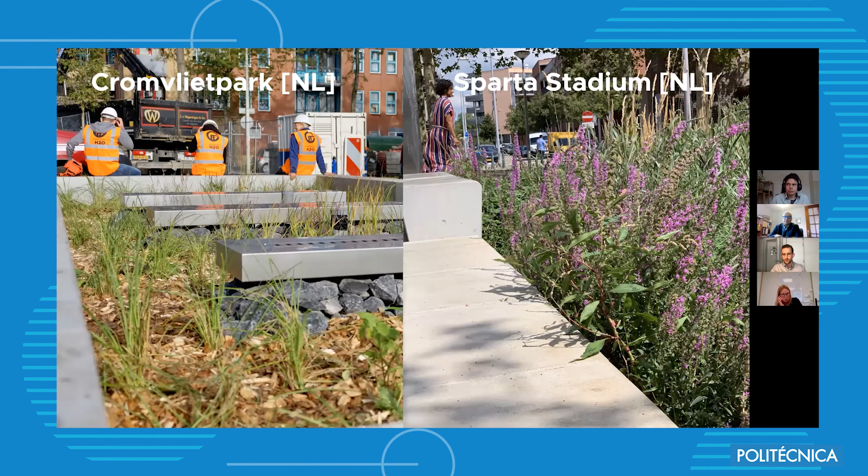But it's not just nice to have them implemented, it also helped to make some major improvements on the technology. Through the demos and the testing we did, Joshua, with the amazing work he has performed, we have really been able to improve the treatment efficiency of the Bluebloqs solution to make sure we are more consistent, but also able to treat different types of water, making it available for different types of reuse.

Also the design optimizations that Joshua mentioned, the changes to the aerator, to distribution systems, all help improve the treatment efficiency. But as you saw, all the different demos share the same basis, yet there's continuous room for modifying and customizing to make sure it fits nicely in the urban area. I think it's really nice that through this, the biofilter is not only a functional addition to the water system, but also gives back something to the spatial environment and makes the area a nicer place to stay.

But what came forward in the panel discussion, and is one of the major outcomes of implementing these demos, is the stakeholder engagement it generated. I think it's nicely mentioned by Wiebke, sort of the snowball effect. As soon as you start showcasing what is possible, it's way easier for different stakeholders to get on board, to maybe become part of the innovation, to do the research, to see what else is possible, but also to give feedback on what can still be improved.

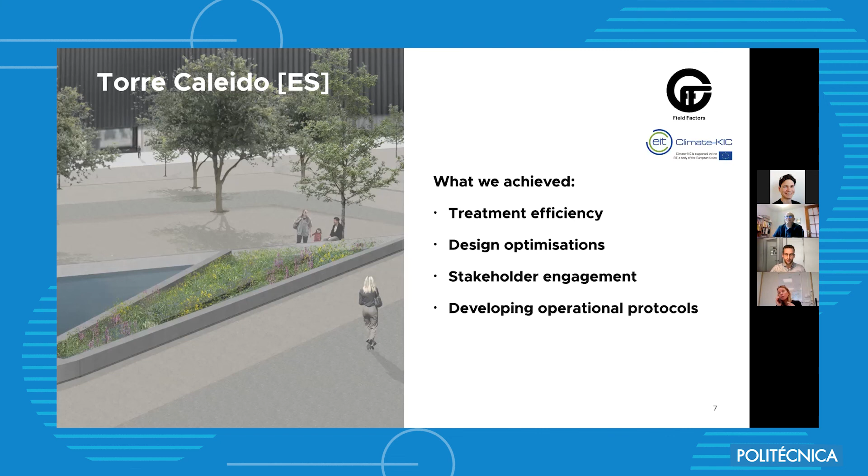The last thing is what Joshua mentioned, the importance of developing these operational procedures. Just implementing these systems is not enough. It's all about making sure they keep functioning in the way they are intended to. For that, you really need to provide the right guidance to the operators in the public field. So I think that is something we all achieved through the demos that were implemented.

But of course, that's not all that happened. The demos were a major part of our project, but at the same time we've been working on the business development side of things, doing surveys with potential clients, exploring different product applications, developing a product service line to really be able to, as Marjan said, specify the impact Bluebloqs can have for a certain application, and to explore which partners are able to invest in it and who will generate a return on investment. So lots of work in that regard.

At the same time, we've been developing a configuration tool that even turned into a really pragmatic tool built into the Sirio platform, which is the go-to water design platform in Flanders. That's very important to make these options available to those designing water systems in Flanders, so they have quick and easy access to calculate what the impact could be.

And also the capacity building, because it's not just a matter of implementing these solutions and proving the technology works, but it's also about preparing the market for the uptake of this rather new intervention in public space. That's about creating knowledge in the operators, creating knowledge within the municipalities and the new procurement guidelines, as Wiebke said, to really make it possible to take up these innovations as a new business-as-usual approach. That's also about changing institutions and legislations in Flanders, in Madrid. Birgit mentioned it - the ASR technology has major potential to really deal with many of the problems of tight urban space and water shortage in Flanders.

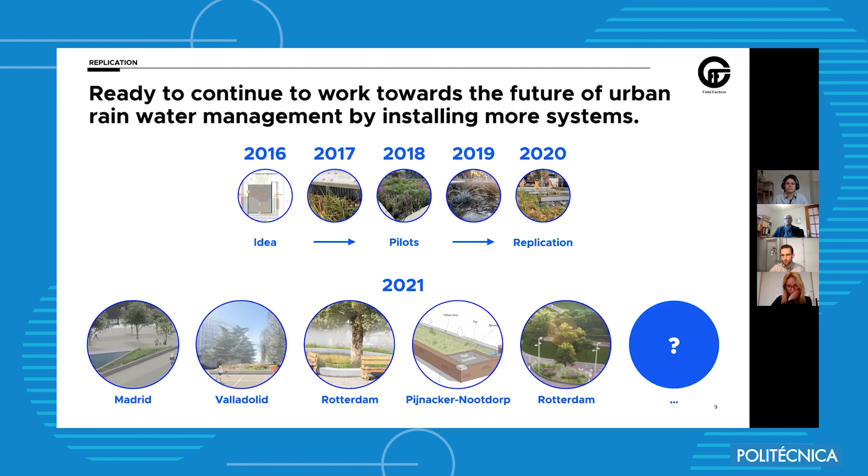And with that, it all sounds amazing, like, wow, what a great result. But of course, there are some lessons you learn over the course of a project. And with those 5, I really would like to send you home and briefly elaborate on all of those. And the first one, I think it's sort of the bottom line of part of the discussion in the panel, but the technological innovation in the end is nearly always faster than institutional change.

So it's really easy to define a problem, think about technical solutions to overcome these problems, to make these technological improvements. But if you don't have the ability to implement it because your business case is not right, or because legislation is falling behind, or because the implementing partners still have to prepare their procurement rules, you won't generate the momentum that you're after.

So it's really good to be aware that technological innovation just moves rapidly, but at the same time, we continuously need to keep working on these institutional changes to make sure that all the market conditions are set for the uptake of more sustainable solutions, not just for Bluebloqs as a circular water system, but in general. If we want to create a systemic change, it's not just technology, but it's also about making these institutions ready for the uptake of these new innovations.

The second conclusion, looking back at what we did throughout the project, is that the proof of concept requires tons of data on the system performance. We had the luxury of having these implemented demos, generating the data on system performance, being able to monitor them intensively. Unfortunately, we had a bit of a delay in the implementation of some of the demos due to COVID. So there is still a lot more data to come, but that's the great thing. These systems are implemented. They will continue running for the next 20, 30 years, and hopefully even longer.